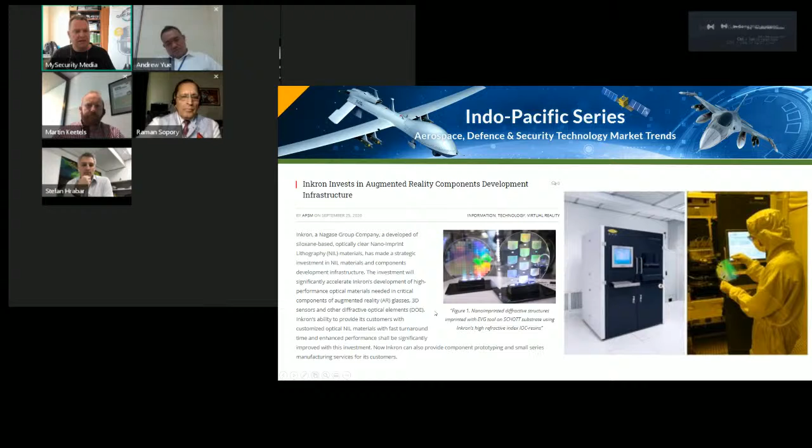A couple of robotic stories: Hitachi has begun testing a 5G powered IoT solution in Silicon Valley. And this is a new robotic arm - beg your pardon, a robotic hand - out of the University of New South Wales, and it's been applied in the construction industry with some University of New South Wales master's students. I'm going to actually reach out to them.

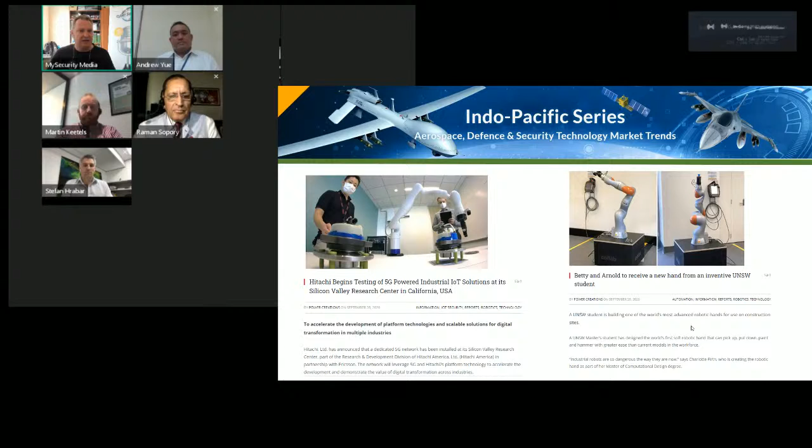Raman had an interesting story on a robotic arm in India, and in a couple of episodes we're going to try and get these two together, one with a robotic arm and one with a robotic hand, and see what we can do together in terms of that particular episode.

So that's pretty much the news of the week on our channel. Just some events that we've been covering. Communicasia is on this week, and mobile network operators are to hire and reskill 1,000 professionals in Singapore as part of their 5G rollout. So there's a lot happening in the training area there. That's the Infocomm Media Development Authority, IMDA, which has partnered with Singapore's mobile network operators to reskill at least 1,000 professionals.

Black Hat Asia is also on this week. Starts today, but I think the conference actually is in full swing tomorrow. And then tomorrow we've also got celebrating 40 years of the Ethernet, from 2.94 megabits per second to 800 gigabits in a matter of 40 years.

IBM Security Virtual Summit ASEAN should be maybe closing off. We might get a couple of weeks more out of that. But that summit is available on demand on our channels as well, covering off on cybersecurity, obviously.

And this episode will come out on Thursday, an interview with Bill Nelson, the CEO of the Global Resilience Federation. I believe he's in San Francisco, discussing the cyber threat intelligence landscape with Bill there.

Finally, the top women in security in Malaysia. The nominations are open for a few more weeks. We've got 3D Printing World in India on the 5th and 6th of December.

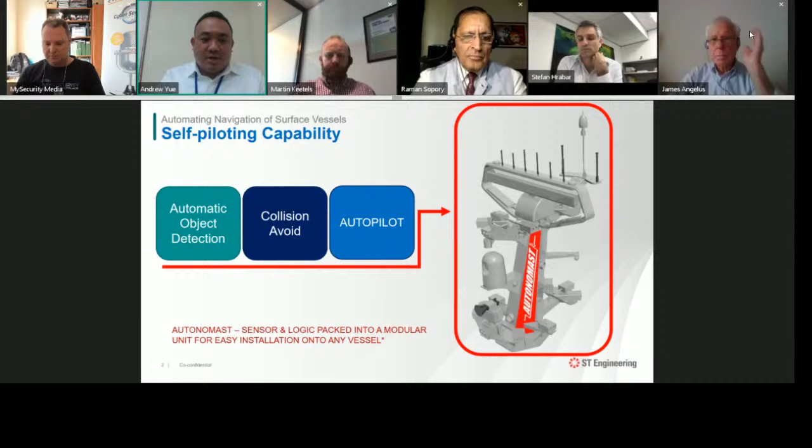So this particular kit, you can install it on any vessel. To give you some perspective, a vessel of 10 meter size can easily fit into an ISO container of 40 feet. So to give you a little bit of scaling, that's how the kit actually looks like. It's easily transportable - you can pack it into a shipping container, and at the destination you just need to fit this kit onto a vessel. Then, voila, out of the box, you get autonomous navigation capability.

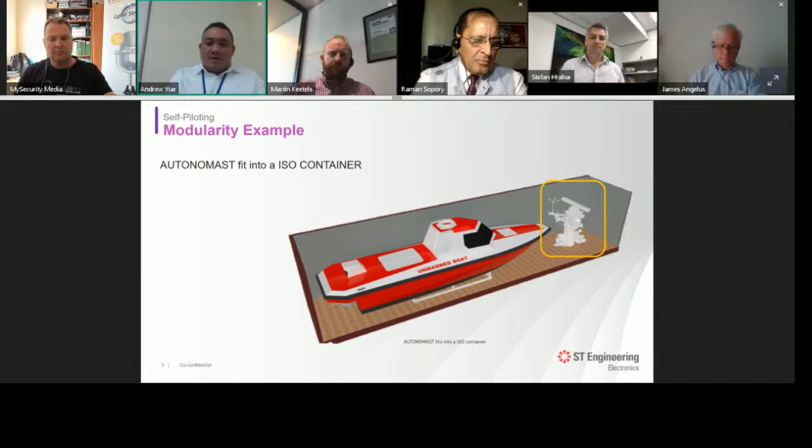And within the wheelhouse, the navigation electronics is packed within a seat-sized real estate footprint. So if you have an existing vessel, remove one seat, fit this box in. This is actually powering the whole sensor fusion and the whole autopilot system on board the vessel.

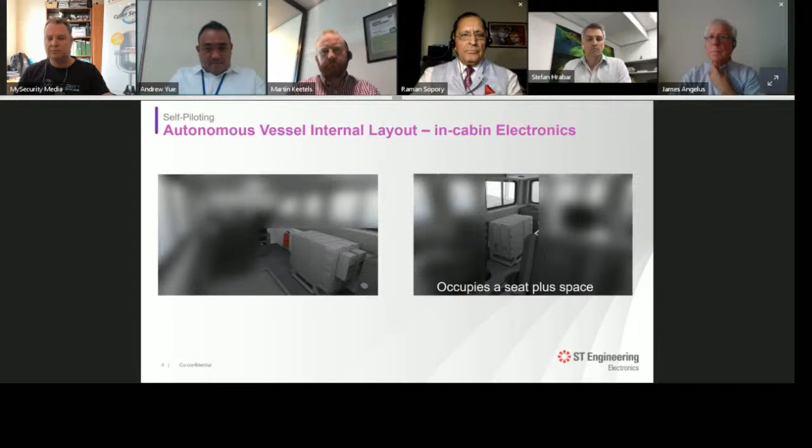Right, so these are examples of interested parties that want to actually build a boat or retrofit a boat with the autonomous kit. On the top right-hand corner, the size of the vessel is about 9 meters in length. At the bottom left-hand side, the size of the vessel is about 15 meters in length.

Interesting applications could include search and rescue. If you want to modernize search and rescue operations, which can be very arduous, long duration, and you have to probably do all these operations 24/7, even until nightfall, maybe equipping it with autonomous technology is the way to go.

Likewise for firefighting. If you need to put a vessel against an oil tanker fire, maybe to unman a firefighting vessel is another way to go. So the human need not be on board this firefighting vessel, but can operate the vessel at a standoff distance.

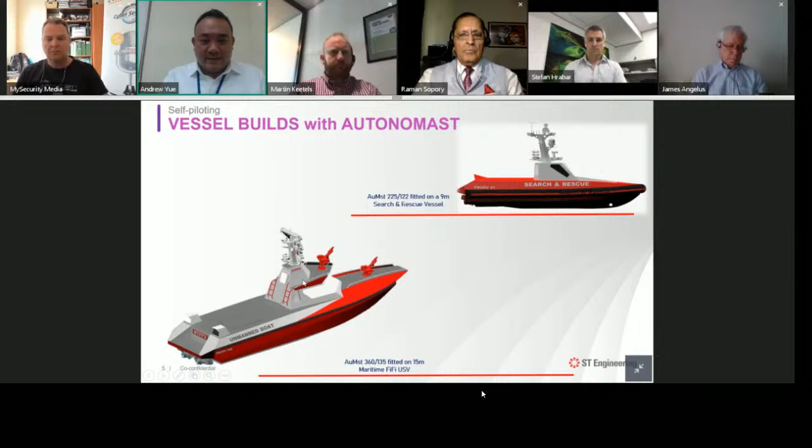Most of the time there's no need for intervention because most of the maneuvers and movements are autonomous. But sometimes the emergency handling and the emergency takeover functions are still available.

On the other aspect, we also augment metadata onto video streams. Over many years of development, we understand that we try not to pass the hot potato to the user at the last bit. So for the robot to interact with the human, to give sufficient time for the human to respond, it's also important for the robot to report what it actually sees and what obstacle it registers.

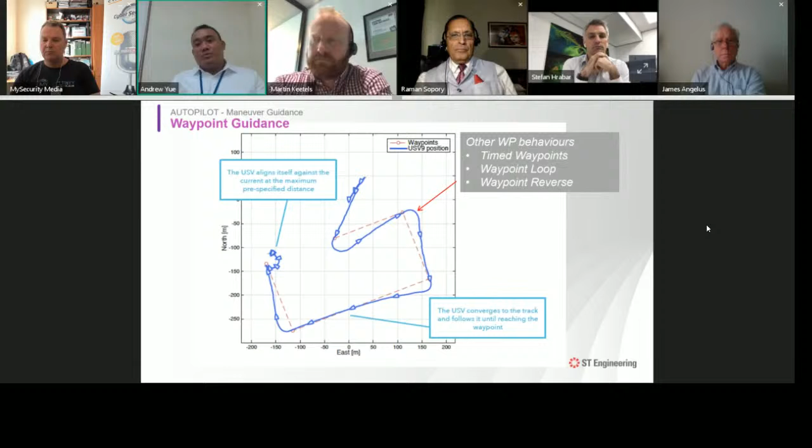But in a search and rescue scenario, you probably want the vessel to swim in loops, or actually reverse, to increase the probability of search.

And how easy is it to fit this kit? It's really not that complicated. It takes about half a day to fit it on, and by the second day you can actually put a boat in water and test out all these capabilities.

So it readily fits onto any vessel with the appropriate mounting. So long as you have a cabin space within to house some of the electronics, then you can actually get an unmanned vessel quite out of the box.

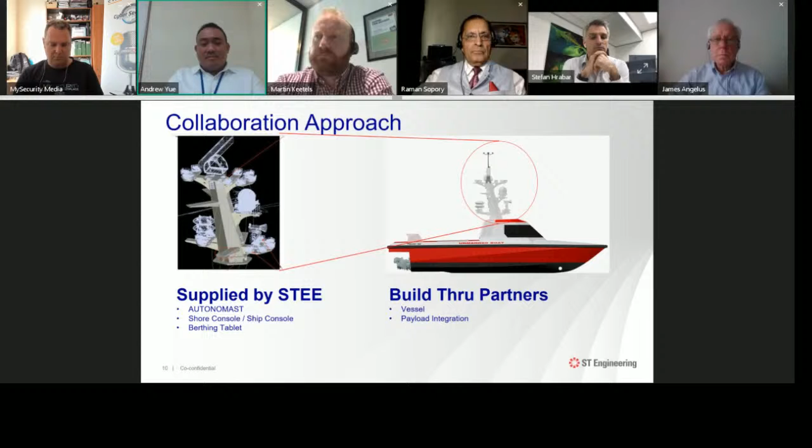So here I'm just trying to show that we have different AUTONOMAST sizes to cater for different vessel sizes. The propulsion or the hull form actually can vary. We just tweak some of the dynamic equations to still achieve the same guidance performance.

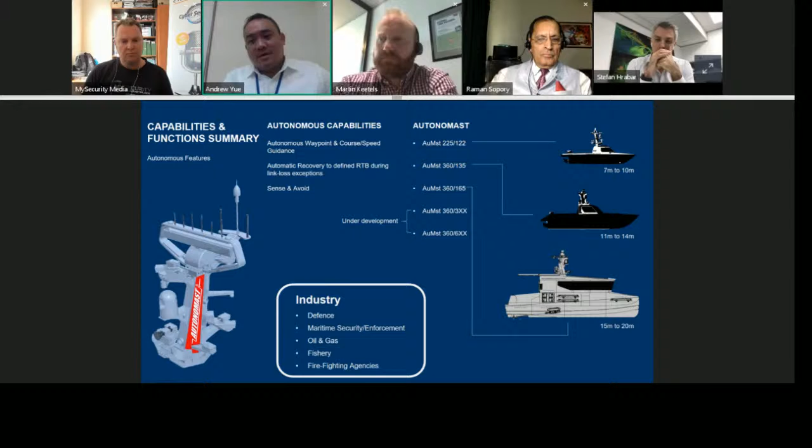And I think the autonomous system is suited to automate the whole maritime surface application in these various aspects, whether it's in defense, maritime security, oil and gas, fishery, or even firefighting.

So with that, I actually end my presentation and welcome any questions. Many thanks, Andrew.

I don't have any questions from the audience, but I was going to say, how small can the objects be to be detected? Is that something that you can adjust in terms of its sensitivity?

Yes, yes we can. And in fact, very low observables—if you're talking about a floating coconut, that's possible to even detect a floating coconut.

And what about aerial sort of connectivity with aerial systems as well? Is it communicated to any other system, or is it a standalone, I suppose is the question—or can it be integrated with other systems?

Yes, what we sell as standard is actually a standalone system, and we are selling this commercially as a commercial product. But of course, if it requires heterogeneous operation and further customization, then we can talk about it on a project basis.

Great, very good, very interesting. Let me just bring that up. Any other questions from the panel on that particular one as well? Go, Raman.

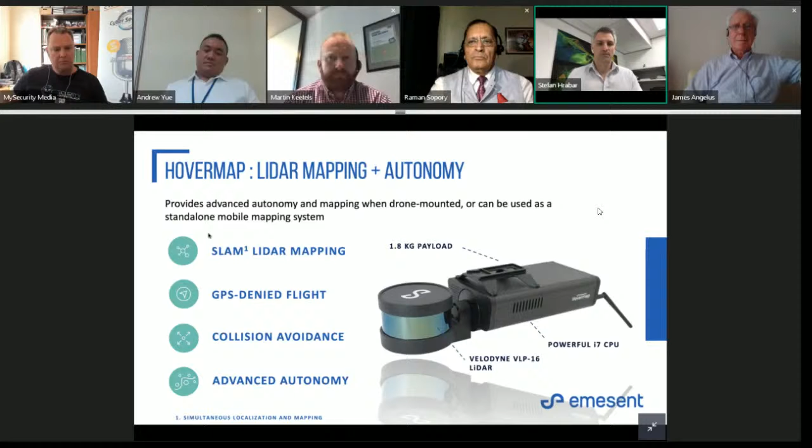You can also just use HoverMap as a handheld or backpack-mounted scanning device, so it's a standalone mobile mapping device as well - very versatile in its deployment options.

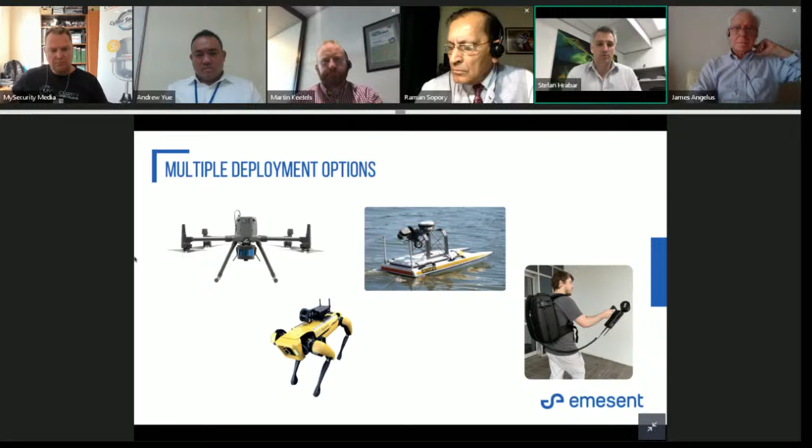In terms of the autonomy, the key thing that allows the drone to fly without GPS and travel beyond line of sight and communication range is that it's operated through a tablet. Once it's up and running, we stream a live 3D point cloud to the tablet, and you simply tap on the map to set waypoints. The system self-navigates to those waypoints while avoiding collisions, keeping itself safe, tracking remaining battery life, and watching for challenging environments with too much dust. It has a number of fail-safes which trigger a return to home if it encounters those situations, and it finds its way back safely.

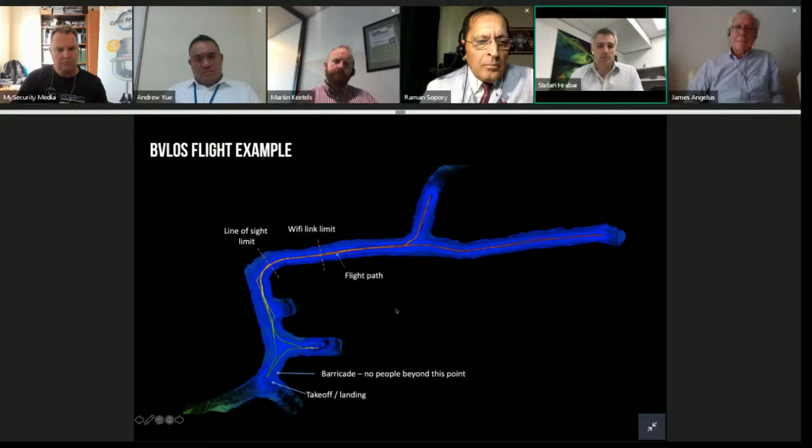Just a couple of examples. This is from an underground mine where they needed to map and inspect an area they couldn't access on foot. In many cases there are areas in a mine too dangerous to send people - there might have been an incident, or an area freshly blasted that they can't access. This is a top view showing the flight path line. The operator stayed behind a barricade and sent the drone exploring down these areas a couple of hundred meters, managing to map them out without putting people in harm's way.

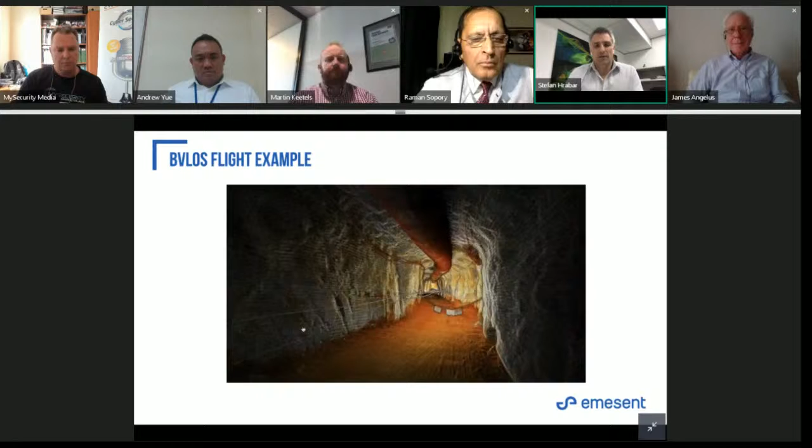This video is a quick animated fly-through of the data collected on that flight. You can see the level of detail captured by this LiDAR device - in probably 10 to 15 minutes of flying, we can map out areas like this in extreme detail.

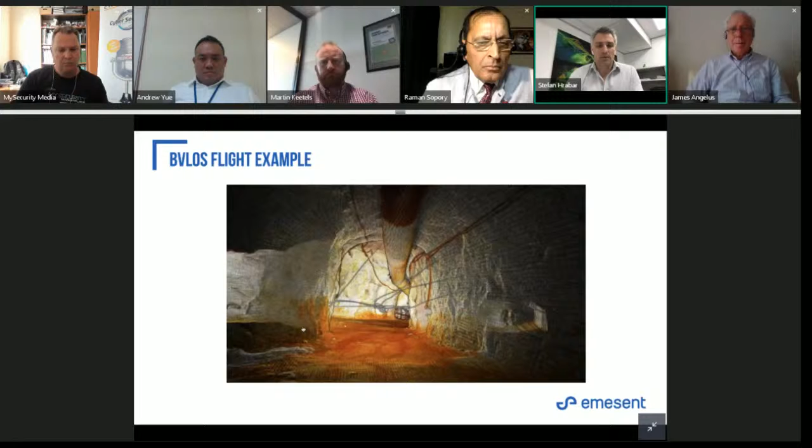Another video just shows how harsh these environments can be. This is an application in a mine where they needed to enter an area that was off limits, where they'd been blasting in what's called a stope - a big cavity formed underground after blasting. They need to go in and take a measurement to see if the blast went according to plan. So they send in the drone.

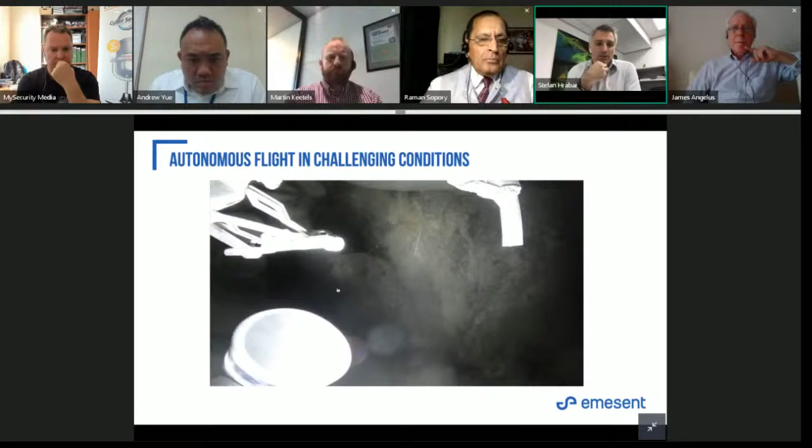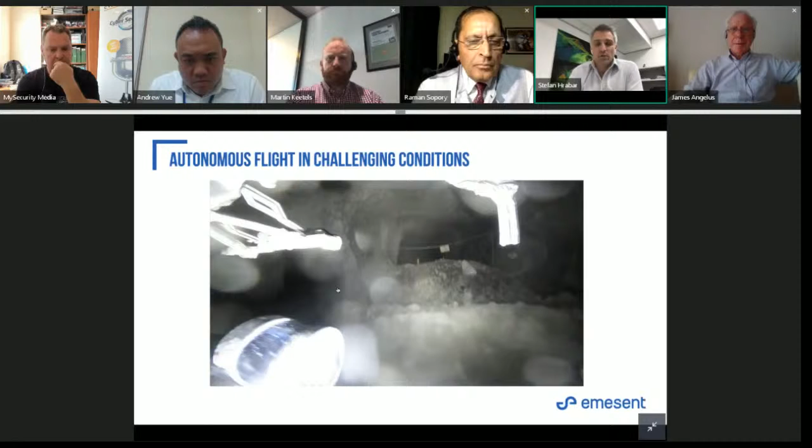It's flying autonomously now, encountering challenges like dripping water, rock bolts and wires hanging from the roof, and wire mesh that can be an obstacle. All the operator has done is set a waypoint somewhere in the distance, a couple hundred meters away, and it's now self-navigating to try and reach that waypoint, avoiding hanging wires from the surface and trying its best to get into this area, mapping in all directions as it goes.

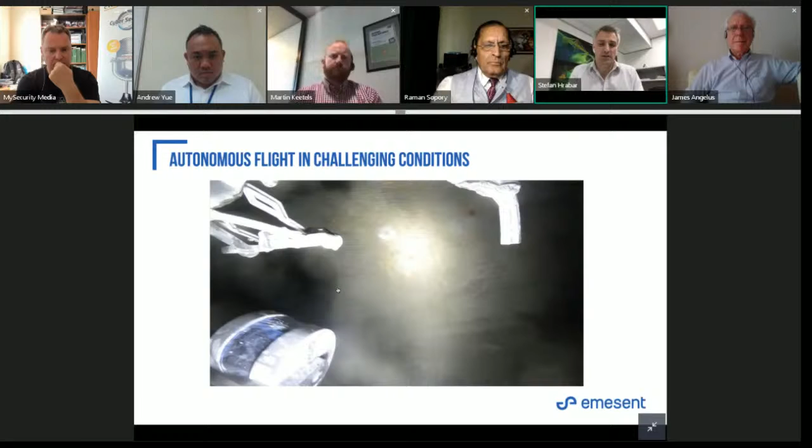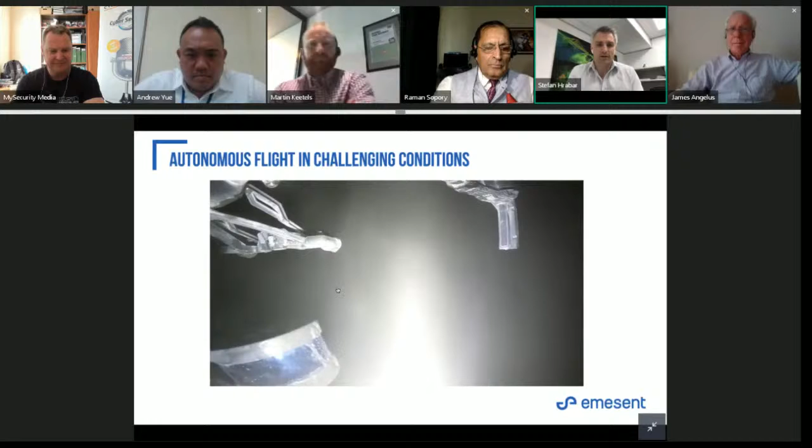Now you'll see one of the big challenges for underground operation: the drone's downwash can kick up dust. It's entered an old, very dry area and kicked up a lot of dust. The system has realized it's getting into a challenging environment where the LiDAR sensor could be blinded, so it's not safe to continue. It triggers an automatic return-to-home response and flies its way back to the operator, still scanning and collecting data as it goes.

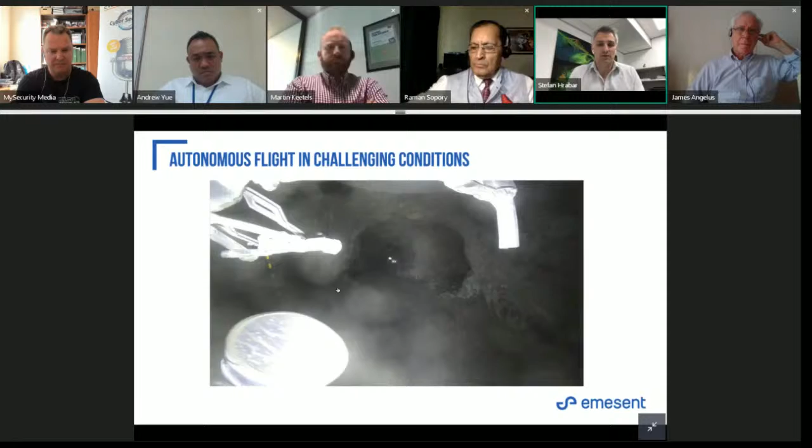This video is also just to show some of the other work we're doing together with our partners at CSIRO. We still collaborate with the group that we were previously part of. Together, we've been accepted into the DARPA Subterranean Challenge.

This is one of the latest challenges set out by DARPA. The challenge is to send in a team of autonomous systems into an underground environment to map, explore, and locate features of interest, and then report those features to an operator. The operator has to remain outside the entrance to a mine or cave environment and control a team of robots that are working together to go and map and find things.

So this video shows the capability we've developed. We focus on the drone capability, and CSIRO focuses on the ground robot, but together these two systems work together. I'll just play through the video and you'll see how the system is deployed.

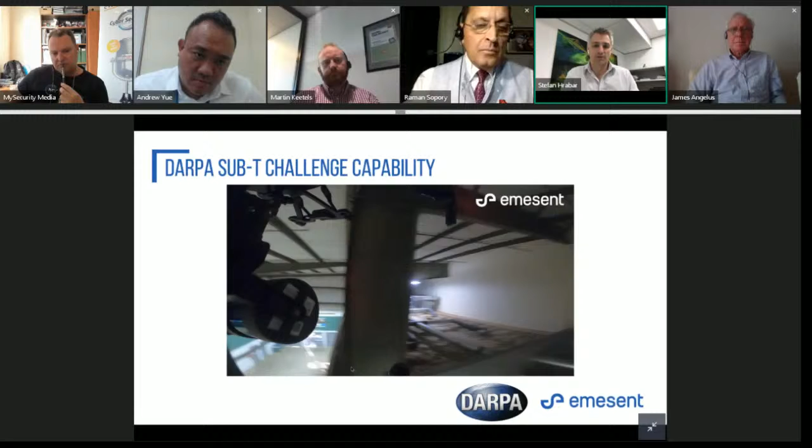The operator sees a rough view of what the drones and ground robots are seeing, and just gives very high-level commands like 'try and explore here, try and go there,' and then the systems are on their own to explore. You can see it getting through some very tight spaces as it explores this building environment.

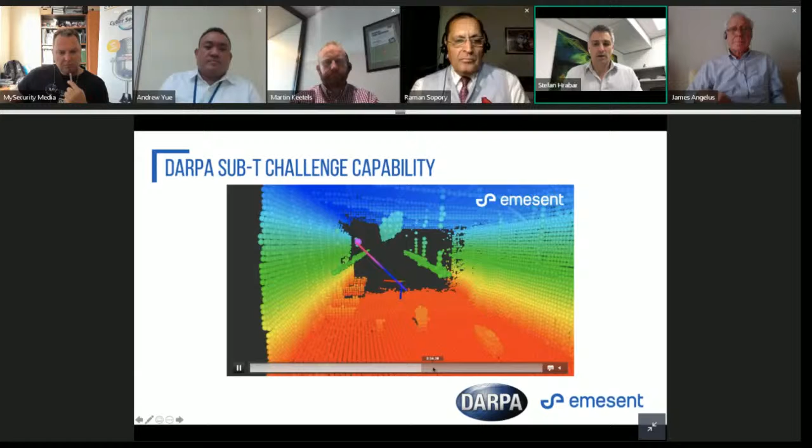Eventually, I'll skip forward a little while—it triggers, the battery runs low, so it triggers a return to home and goes back to land. You can see the two systems working together, the drone and the ground robot exploring this area. Now it's heading back home. It doesn't yet land on the ground vehicle.

It'll just land somewhere by itself, as long as it's close enough to stream back through the mesh network all the data collected, and score points for the competition by identifying those features. I'll skip forward to this—this is the data that's actually collected, a 3D point cloud rendering of the data captured during that flight. You can see the flight path of the drone as it went down exploring these passages and other areas, winding its way through sort of very complex infrastructure.

In terms of the competition, we've been through two competition events so far and done really well. We've been in the top 5 for both events.

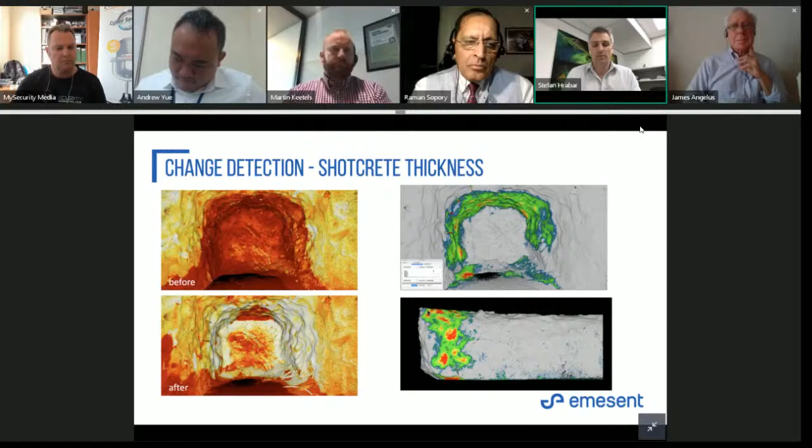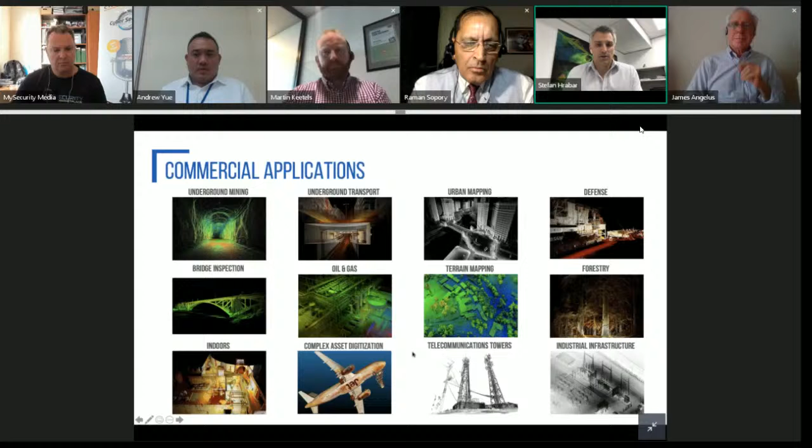In terms of commercial applications, I've mentioned mining, but there are many others that share this common use of capturing 3D data in a rapid, easy way where there's no GPS. You can see some examples here, and I'll go through a few in more detail—this is capturing detailed as-built data of large infrastructure above ground for mining as well as underground.

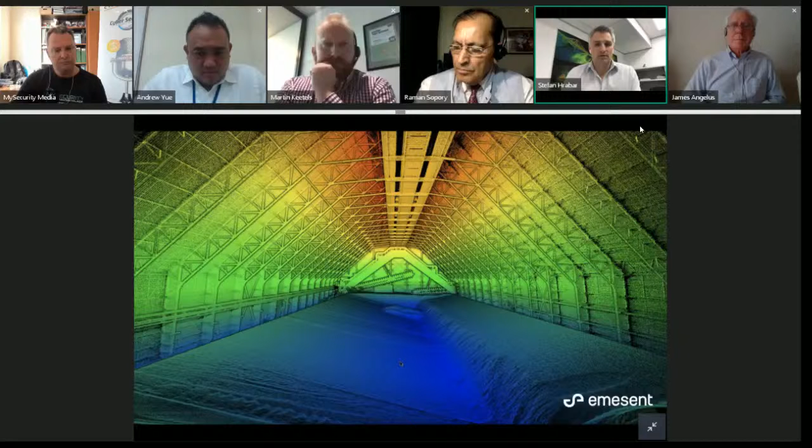Another example is indoors—this is an indoor stockpile. Again, this is interested in the volumes, but they can also assess the condition of the actual structure by flying around in there.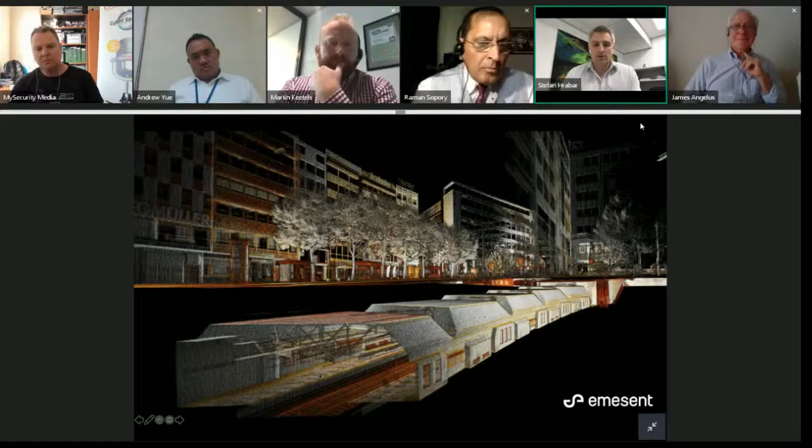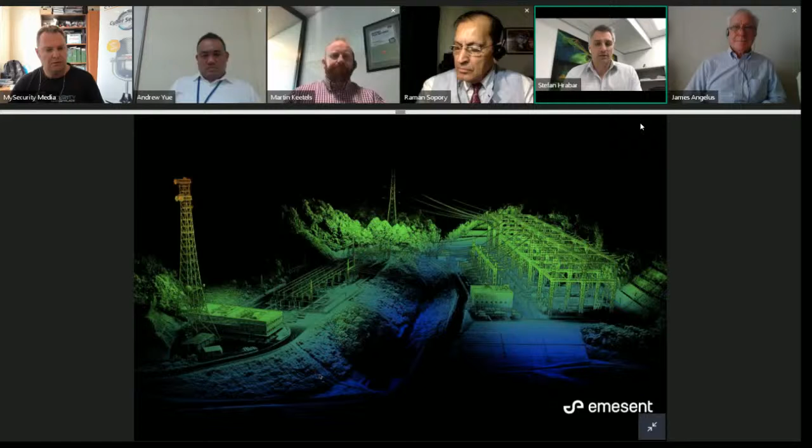Other large critical assets like bridges—you can capture the 3D data, but the HoverMap also allows the drone to fly safely underneath them to capture high resolution images. Other examples include power infrastructure that needs to be inspected and maintained, all using HoverMap to keep the drone safe. And this is another example, flying inside a hydro power plant to inspect it and generate an as-built.

Another interesting application is capturing quick digital twins of assets. This is a walk-around of a 737, walking around the outside and then inside to generate a digital twin of that asset. Or naval vessels as well—this is a strong use case, to capture as-built data of these vessels so they understand what's on there, because the blueprints might be out of date.

Sorry, Stefan, have you tried to match the CAD drawings? You talk about digital twins for infrastructure—have you actually overlaid CAD drawings onto some of these images? We haven't done that ourselves; our customers do that. Our software just produces the point cloud, which can then be imported into 3D CAD packages from Autodesk and Bentley to do that comparison.

This is an example where we had HoverMap on the surface vessel with a side scan sonar as well, and we could match up the above and below water scans to get a complete picture of a port's infrastructure.

Does it work underwater, Stefan? No, this is not HoverMap. HoverMap is LiDAR in the 905 nanometer range, and that will just be absorbed by water. So the underwater scan is done by a side scan sonar, but then we could marry the two up with HoverMap on the surface.

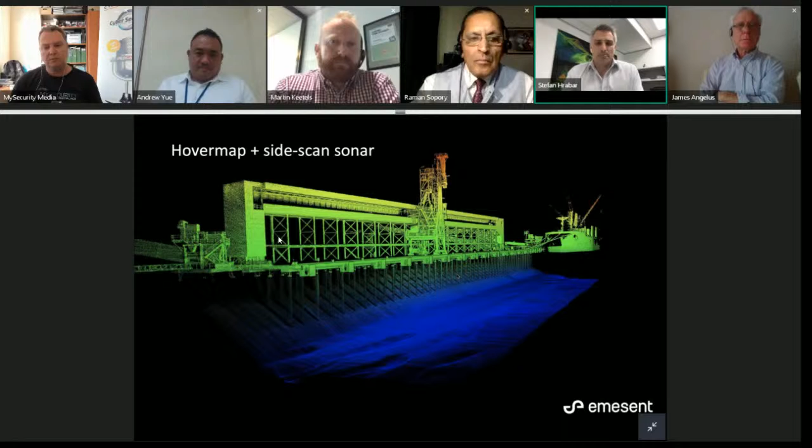Obviously, LiDAR by itself doesn't provide color information, but we can add color by mounting a GoPro, and we do a calibration which matches the camera to the LiDAR, and we then can project color onto the LiDAR point cloud, which adds some additional context.

Another thing we can do, depending on the drone, is carry a camera at the same time. HoverMap keeps the drone safe while you're capturing inspection images, or in this case, this is a thermal camera on the drone flying underground. You can see water dripping through here. If you're doing search and rescue, you'd be able to pick up the thermal signature of people. So applications there for thermal in underground and other search and rescue environments.

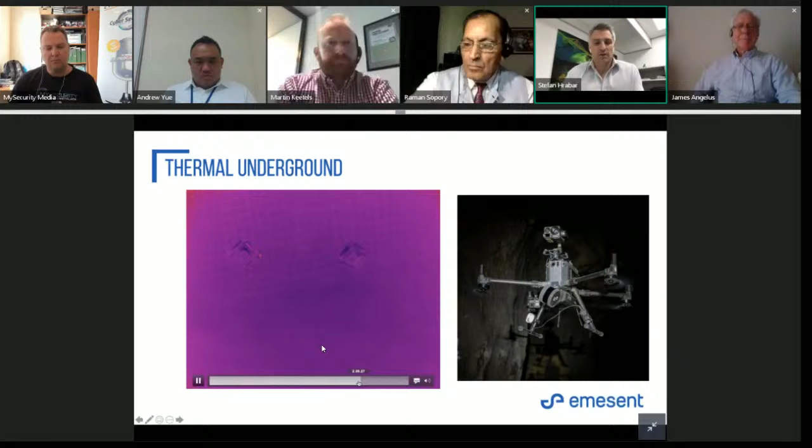Just mentioning that we've got a number of customers around the world. Many of the big mining companies are using HoverMap in their mines now, and a couple of other applications, and a distribution network around the world who are supporting us, servicing and selling for us. It's been used very widely, with a very strong track record in mines and other areas around the world.

I think I'll leave it at that, and I'm obviously open to questions during the Q&A session as well. Thanks. Very good. Thank you, Stefan.

There was one question from the audience: how much depth, thickness of shotcrete can it measure? I take it that's up to the payload you're using, but the LiDAR is only surface level, isn't it? It doesn't penetrate. So to see that thickness, we do scan one, then they apply the shotcrete, and we do scan two, and we're just measuring the difference between the first and the second scan. Got it. Yeah, to show the thickness.

Go, Raman. One customer has called me. He wants to set up a joint venture with you in India. Are you open for this? Yeah, we're setting up distribution partners in India. Obviously a joint venture is a little bit different, but certainly happy to have a chat. A lot of inquiries have been received on a mobile phone, and people want to get back to you. A lot of opportunities. I think you might get the biggest order from India very soon.

But firstly, let me introduce myself. My name's Martin Keetels. I'm the National Manager of Emerging Technologies for Konica Minolta. Now, many people on the webinar may have heard of Konica Minolta before, and it may seem a slightly unusual product or service for Konica Minolta to be supplying. KM's got a great reputation and brand for photography, but also for print management and solutions around the office as well, and it's because of that heritage of supplying maintenance services and solutions.

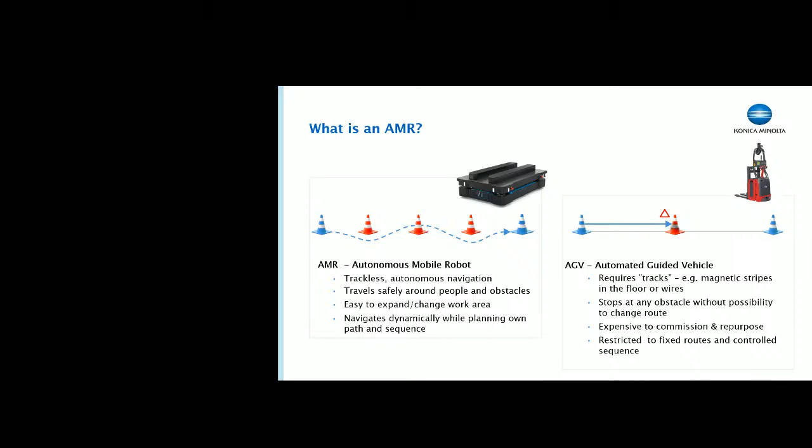Similar to India, Australia has a very large geography, quite a distributed population. Konica Minolta, for example, in the Australian market, we have service capability in around 80 regional centres around Australia. Now, if you were to speak to a robotics manufacturer, an OEM, around setting up the same service infrastructure in a country like Australia, it just wouldn't be possible. It's not feasible, nor is it economic. So that's the reason why Konica Minolta is really leveraging our existing infrastructure in this space, and that's the reason why we play here.

What I do now want to touch on is the difference between an AMR and an AGV. You'll see that an AMR is trackless, and one of the reasons why I believe I'm here today is the autonomous nature of this. So similar to what Stefan was talking about, the AMRs utilize SLAM methodology to navigate autonomously around their environments.

A little bit different to that particular product, but when you're deploying the MIR robot, you set it up in a mapping mode. As it scans the environment in which it's operating, it looks for both dynamic and static objects, and it utilizes static objects as a way to create localization, so it understands where it is at any particular point. It looks for a familiar static object in the environment roughly every 12 meters that it travels, and that's how it's able to localize itself.

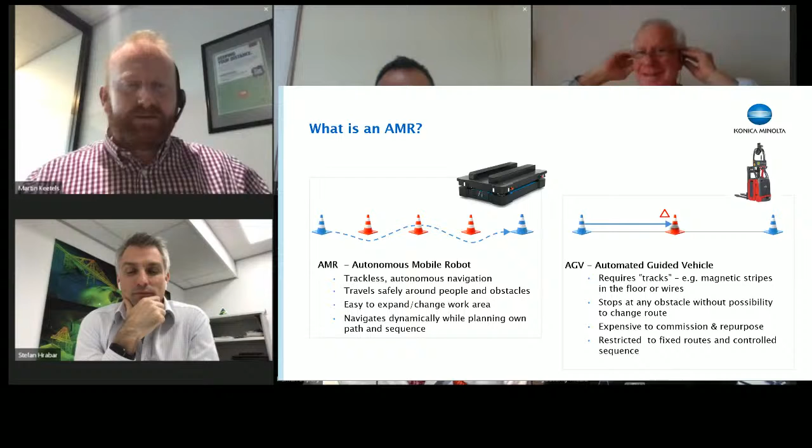So, Chris, I might get you to move through to the next slide, if that's okay. Yep, just one second, I got kicked out there, so I'm just going to double check that we've got... hang on, my computer is not liking me at the moment. So I did disappear, but I think we should be okay. One second, you're saying screen 2? Okay, you can see that one? Whilst Chris does that, thank you.

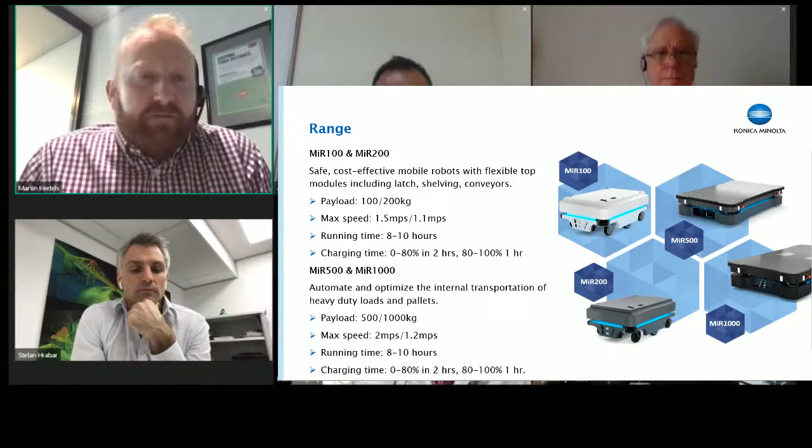By way of explanation, the video you saw at the start is the deployment of a MiR200, one of the platforms that holds up to 200 kilos. That's at the 36th Squadron at the Royal Australian Air Force in Amberley. The acquisition of that particular item was conducted through Air Force's innovation arm. So we're really seeing the Australian government, and in fact the Defence Force, hungry to test and acquire new technology and move its capabilities into the next century, utilising Industry 4.0 technology. That's incredibly exciting and something we're incredibly proud to be working with the Defence Force on.

I'll quickly run through the types of robots that the MIR OEM manufactures. You can see the MiR100 and MiR200 on the left-hand side, with payload of 100 or 200 kilos per the naming convention. It moves at speeds of up to 1.5 meters per second, a fast walk, with running time of 8 to 10 hours and charging time of about 2 hours to get to 80%. So utilizing this sort of platform instead of having someone move a trolley or taking up a valuable person's time moving things, this product would certainly very quickly make financial sense.

You also then add the safety element to this, which is that you don't have people pushing or pulling heavy weights, and as a result the people around your environment are safer. So from a work cover perspective or an insurance perspective as well, there's certainly a lot of value add here.

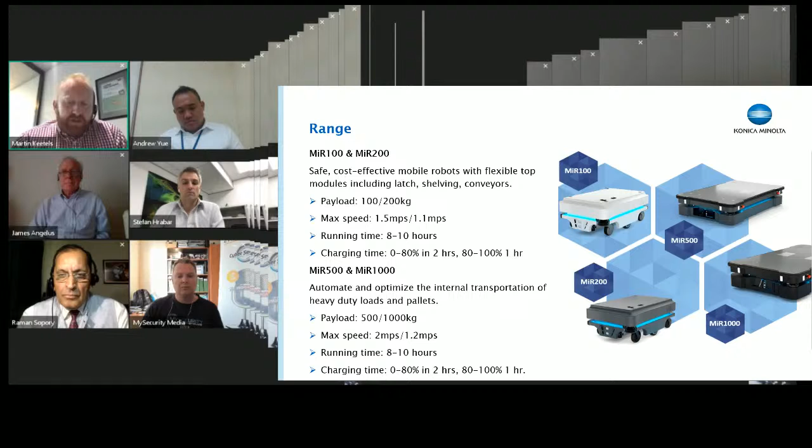You'll see here the movement of palletized product around a warehouse. It doesn't matter if it's civilian or military applications, but essentially this is a way to automate pallets. In this example, moving from a palletizing unit that sits on a conveyor, around 200 pallets per shift over an 8-hour shift, are moved from that palletizing location to a staging area. At the end of that staging area, they're put onto an accumulation conveyor, which has about 13 or 14 different locations for those pallets, and then they're moved onto the back of a truck for transport to their final location.

Okay, so here we go. We can see here it's a bit of a fly around, we can see there it's moved through the palletizing machine. We did have a question as well.

What dimensions are they, Martin? They're roughly 1.2 by 80, something along those lines, depending on the different model, but that's probably one of the larger ones. And I'll take it you can put different platforms on top, to make that base bigger? Yeah, we call those top modules, and there's an ecosystem that's developed around the MIR product, available on the MIR website, or on the Konica Minolta website here in Australia. You can go to the MIR Go part of that, and that's the ecosystem of top modules and solutions.

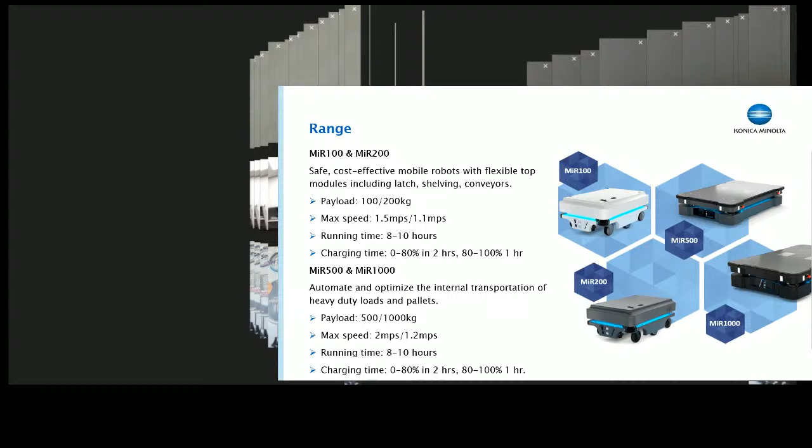Great, and that's pretty much all I wanted to share with the audience today. If you have any other questions, delighted to take them.

Very good, thank you Martin. I don't have any questions from the audience other than the ones I asked. Is there any other questions from the panel on this before we wrap up the robotics and autonomous systems? I think from my observation, it looks like they use very similar technology, obviously the LiDARs and the video analytics and the like. I suppose the real smarts is how you get that software talking to each other and bringing these systems together and actually deployable.

One question, Andrew, is your system commercially available as well? Right, very good, it is commercial. Okay, so look, all of these systems are commercially available, and I think we'll obviously have anyone from the audience who is interested in making a link through to these gentlemen, please let us know as well.

James, did you have a question there? Sorry James, one second. Yeah, go Martin. Oh yeah, James sorry. Quick one is, how are you set up with KM in Australia? As a representative of KM or as a joint venture, or are you independent and have just a contract with them, a distribution contract? What's the nature of that relationship?

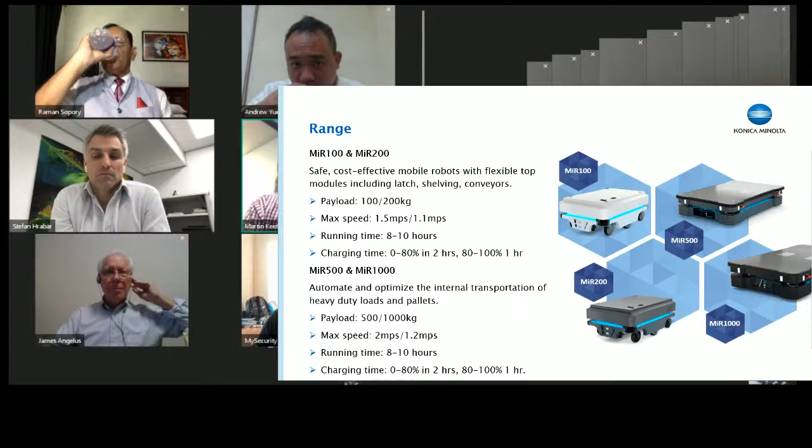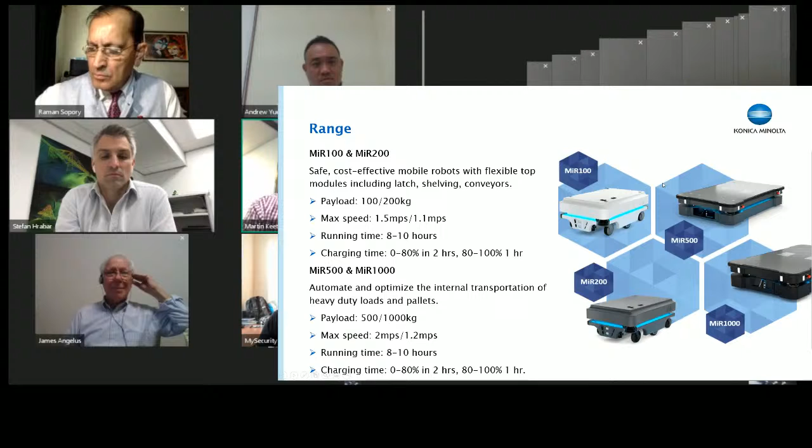Yeah, thank you James for the question. We are the distributor in the Australian market. Indeed, we're distributor in the Asia Pacific, most of the Asia Pacific economies as well, and that's given us the ability to also be developing some software around this product. So we've got R&D teams in Singapore that are developing a data collection tool, so we're able to collect data and provide feedback around bottlenecks, how to optimize the movement of material around the warehouse or the factory or the facility. We're also doing a lot of work around remote fix and putting some software onto the robot so that we can create a better customer experience for the end user.

And finally, we're able to also add our financial assets to the sales effort, and we're able to develop robot as a service. So one of the exciting things we've been able to do is provide our customers the robots as a service.

And that actually was one of the questions I wanted to ask Stefan around his product - what's your commercial model behind the drones? Is it per mission? Do you charge a service fee, or is it straight acquisition and licensing? How does it work? A mix of robot as a service and straight acquisition in some cases, so definitely looking for that sort of recurring revenue model. Interesting to hear you guys are doing the same - has its challenges, but benefits as well.

Yeah, I suppose Andrew, that's a good question for you as well. What's your commercial model around the technology and how it's deployed? Do you sell it or lease it?

Yeah, I mean normally for a pilot product, we do lease, just to understand the users and how you're using it. But after that, if there's a bigger take-up, then yeah, we do sell the kit.